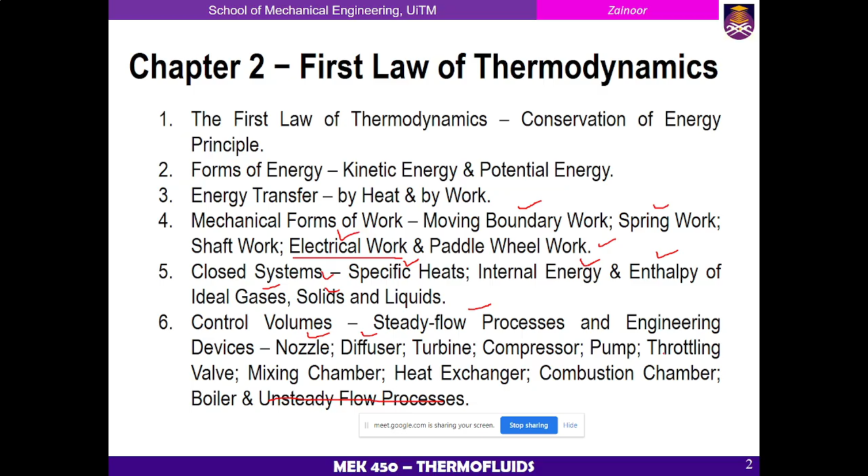So we look into the first law of thermodynamics. This is a law, not a theory. Bear in mind what we learn in university is not a theory. So what you learn here is a law. Law means it is supported by the fact.

And the equation or the assumption used inside this law has been proven scientifically. So, first law of thermodynamics, same as what you have learned in Newton's law. So this is a law.

But here we mention only thermodynamics. The first law is usually referred to as the law of conservation of energy, which means that it cannot be created or destroyed. So energy cannot be created or destroyed, but it can be transformed into another state.

So energy cannot be created or cannot be destroyed, but can be transformed. So in general, the equation used for this definition is: energy in minus energy out equals the change in the system.

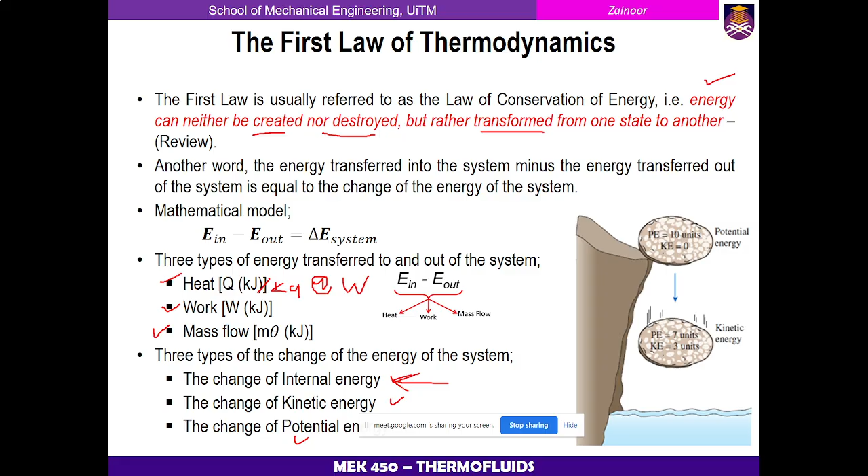Right, so this is the general equation: energy in, energy out, is the change in the system—energy in the system. So in the equation we can define heat, work. So this is your mass flow rate. So in, out, and then change in system, we have internal energy, kinetic and potential.

And then rearrange the equation, so we get this. So this is your general equation. So individually you can recognize. So for this portion, this is for individuals. So this is your individuals.

Okay, so what is meant by del? Del is a path function, which means that you have point 1, point 2 - point, path function, point. So it means process 1 goes to process 2. It's a path function. Okay, so here we have a state function, which means that this is solid, liquid - this is state function, or liquid up to gas. So this is a state function.

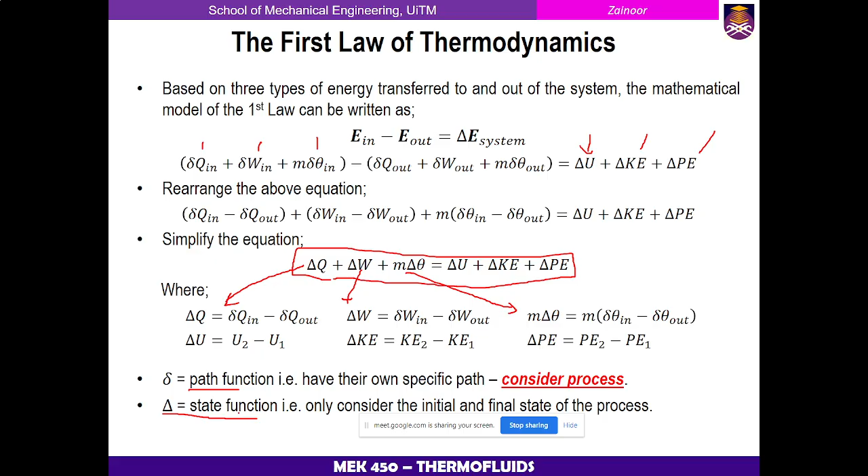So remember, these are two different things. Energy transfer - the form of energy that is transferred between two systems, we call it a temperature difference. So that means if you're talking about heat energy, it must have a temperature difference. Heat without a temperature difference has nothing - we call that equilibrium. So heat energy always refers to the transfer of energy because we have a temperature difference. So basically when we talk about heat energy, it normally refers to energy being transferred. While heat is energy, temperature is a measure of energy. Heat is one type of energy, temperature is a measure of energy.

So we have another term, we call it entropy. This is in the second law of thermodynamics. Later we'll discuss it. For now we know we have one more unit besides enthalpy - we have entropy. This is in the second law of thermodynamics, we'll look at it later.

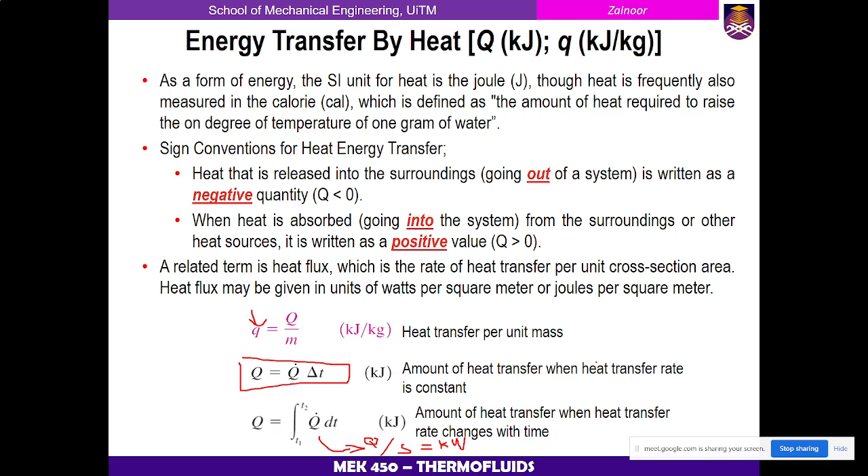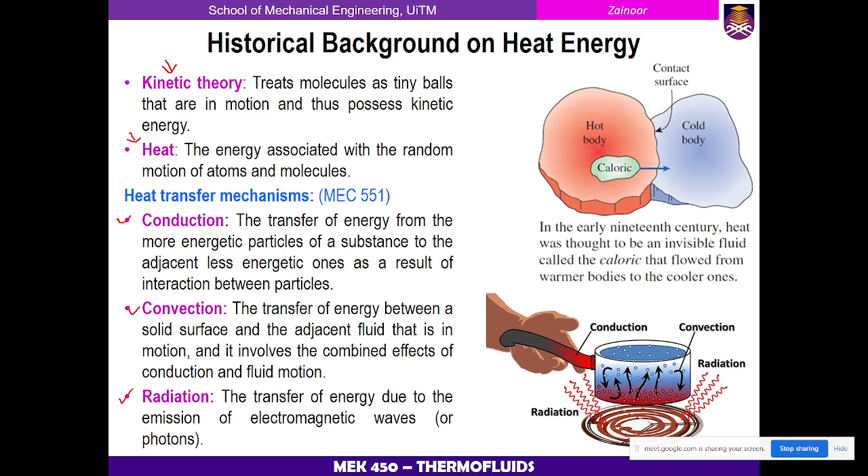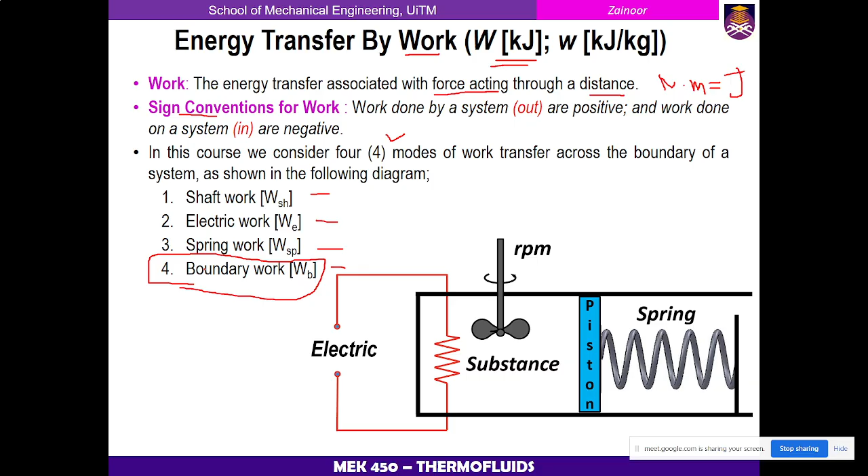So in this course, okay, normally we will consider 4 modes. So kita ada shaft, electrical, spring and boundary work. So this is paling banyak kita akan tengok dekat sini, boundary work. Nanti kita akan tengok lebih detail. Okay, right. So heat versus work. Alright. Okay. So both are recognized at the boundary of a system as they across the boundaries. Okay. So basically you must have a boundary.